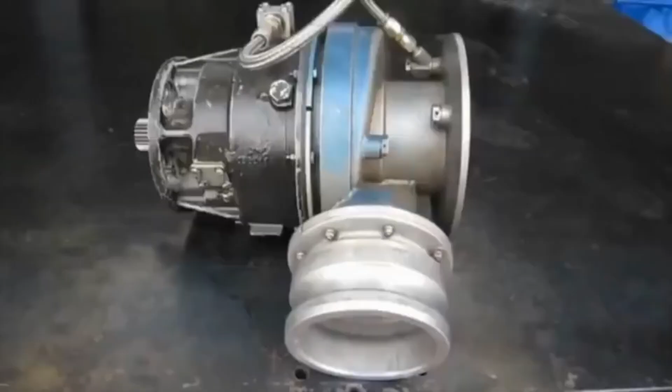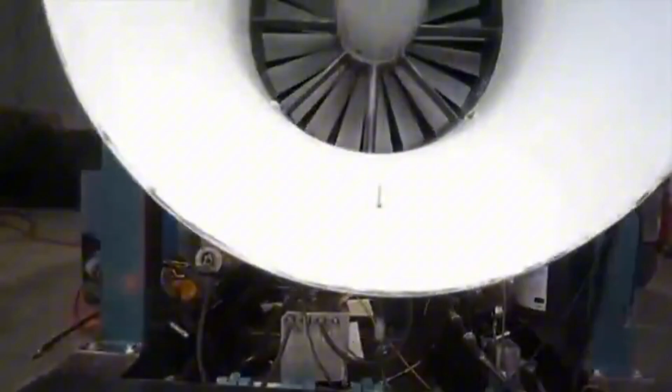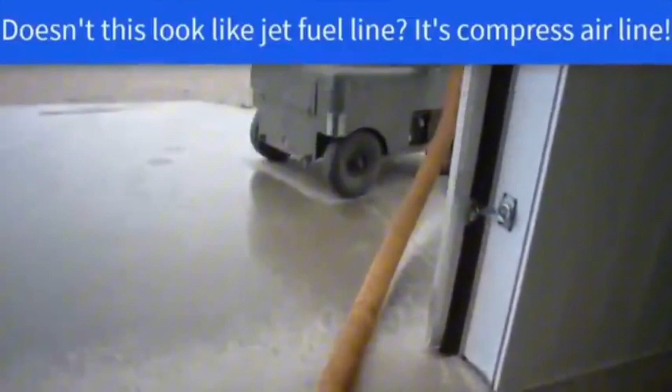We've shown this thing many times, but we're going to take a much closer look at it today. This is an air turbine starter for a jet engine, this jet engine. And there we go, our starter's attached, the airline is hooked up, start cart's in position, and Mr. Bill is warming up the fuel system. We get a little bit of light rain just before we run this engine.

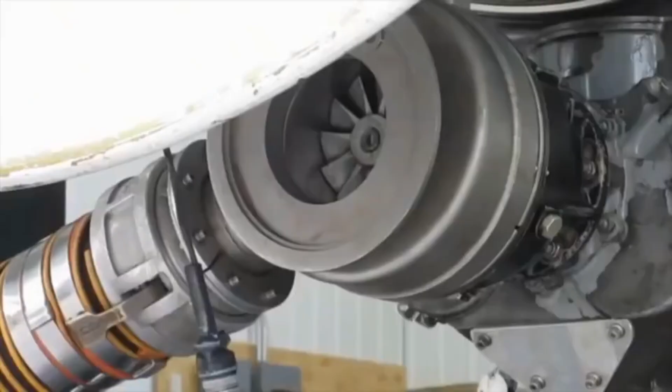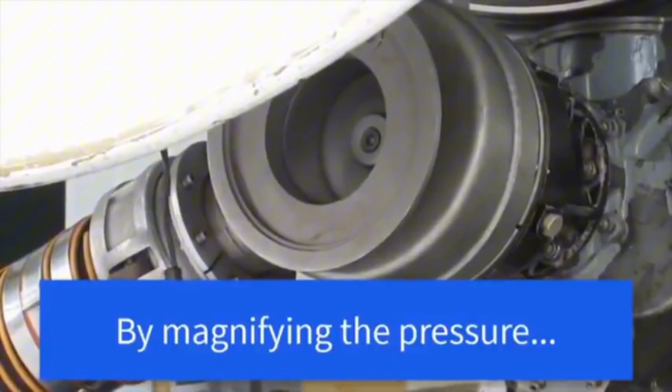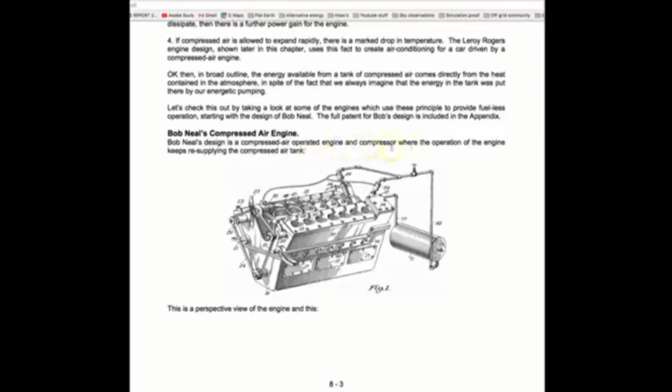Fuelless engines. The energy in air: Bob Neal's compressed air engine. Bob Neal's design is a compressed air operated engine and compressor where the operation of the engine keeps resupplying the compressed air tank.

Scott Robertson's compressor system. Bob Neal's system could do with some further explanation, so here's an idea from Scott Robertson.

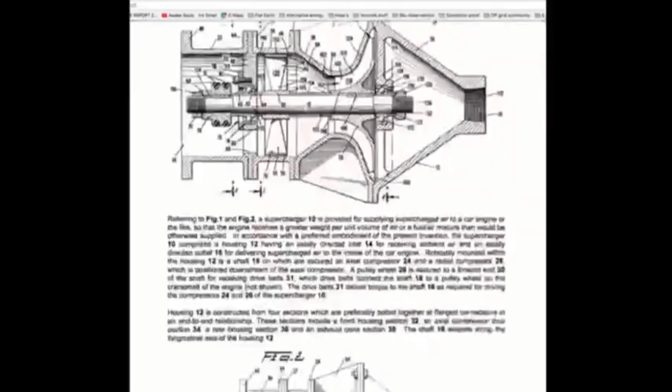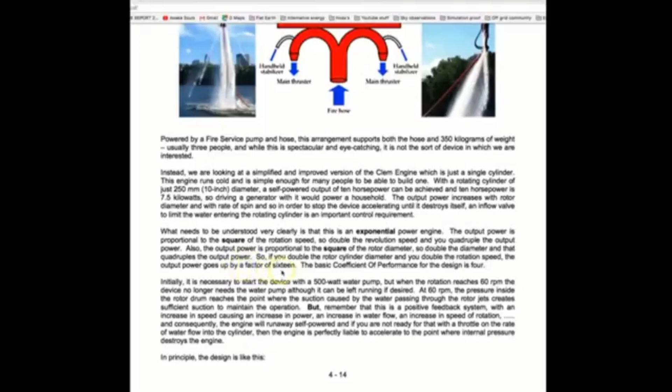What you need to understand very clearly is that this is an exponential power engine. The output power is proportional to the square of the rotation speed, so double the revolution speed and you quadruple the output power. Also, the output power is proportional to the square of the rotor diameter, so double the diameter and that quadruples the output power. So if you double the rotor cylinder diameter and double the rotation speed, the output power goes up by a factor of 16.

We have the engine manufacturers themselves saying that 90% of the thrust comes from the compressed bypass air and not from the combustion chamber. That's not me saying that, it's the people who design and make these jet engines. So it must be true, right? Yes and no. Let's get into it.

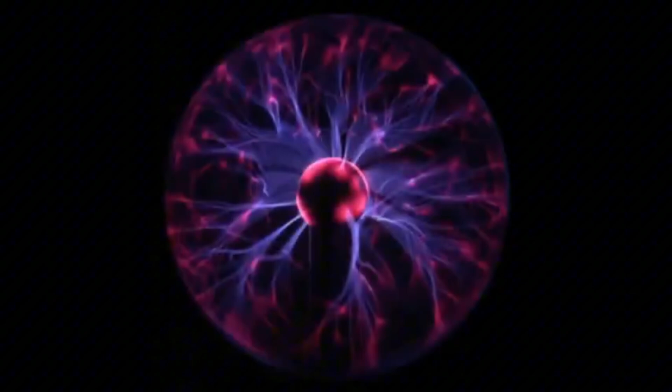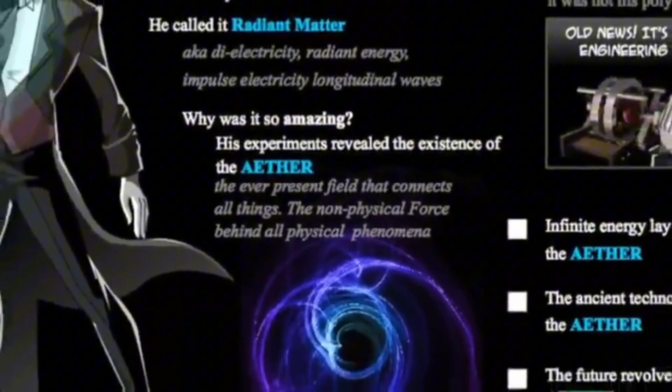To make sense of all this, we have to embrace the idea of the ether. The ether was a totally accepted element in the past. Before Einstein and his wife concocted the widely acclaimed relativity theories, everyone, including all of the scientists, knew the existence of the ether. In one fell swoop, Einstein got rid of the ether and everybody else followed suit.

The age-old technologies used in the design of these aircraft and engines also utilize the properties of the ether. That's the bit they're not telling us. To do so would fly in the face of contemporary scientific thinking, and they would be forced to recognize the existence of this hugely important element.

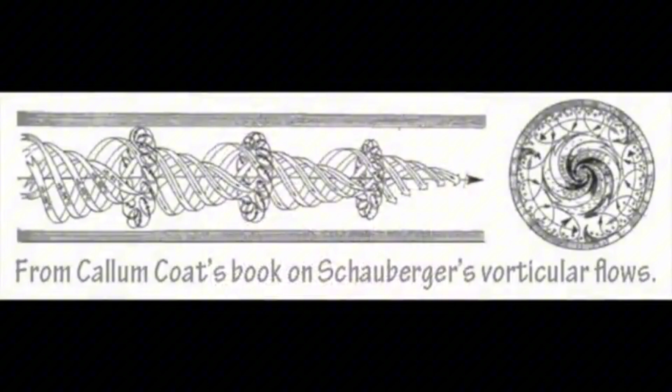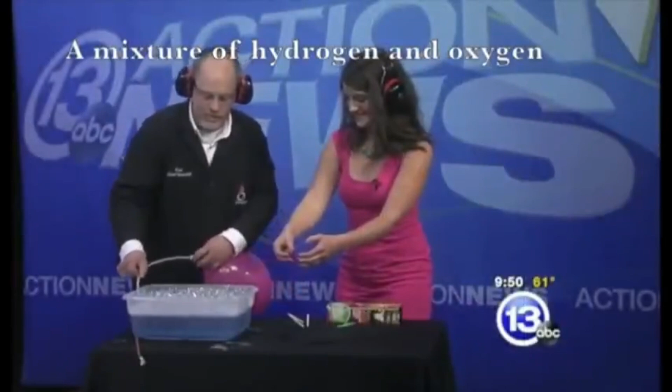Let's start with implosion technology to show you that he wasn't just making this stuff up. As you will see in this clip, the gas that she's holding would normally be enough to blow a gaping great hole in her hand, but it doesn't, because it implodes rather than explodes. The force goes inwards rather than outwards. Implosion technology. In 3, 2, 1.

Okay? You could judge by the loudness of the implosion that there was a great deal of energy created, enough to seriously injure her, but apart from being slightly shaken up, she seems fine.

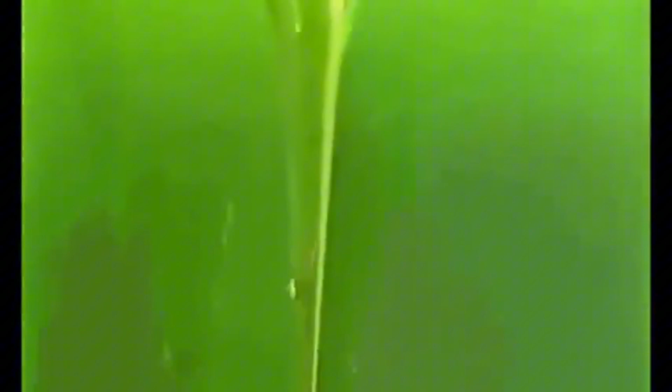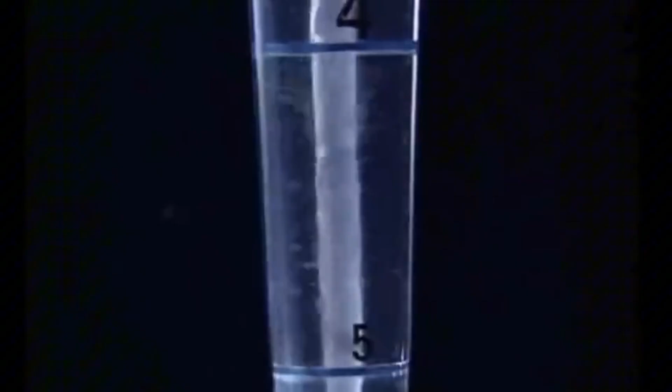Victor's main body of work was with water, but he postulated and demonstrated that this technology works just as well in other mediums, one of them being air, or the ether. Air is our medium, water is for the fish, but the two are intrinsically locked together because both mediums behave the same way when coerced. These patterns and properties are used throughout nature, in the environment, in trees and shrubs, in flowers, and in animals. Basically, the whole of nature conforms to these rules, and Victor figured it out.

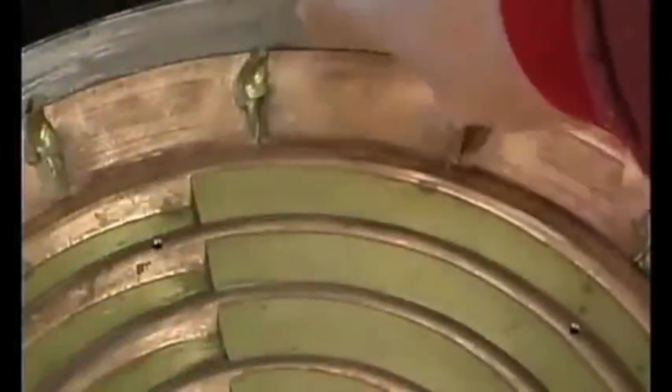As I showed earlier, Victor confirms that using the vortex idea on an aircraft, it will literally suck its way through the ether rather than thrusting against the air molecules. Schauberger's central approach here was the principle of matter transformation. The elements of the air, particulate matter and gases, are converted in this repulsator. One part escapes through the ring rotator, and the radiation energy, Schauberger talks about synthesis electricity, is emitted through the central axis. The repulsator creates a biological vacuum along the axis in front of it, into which the aeroplane is sucked.

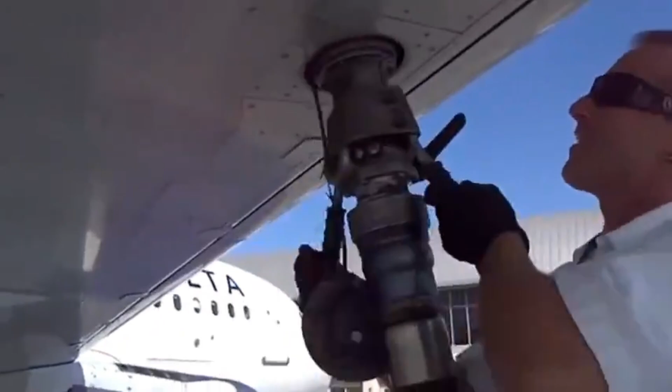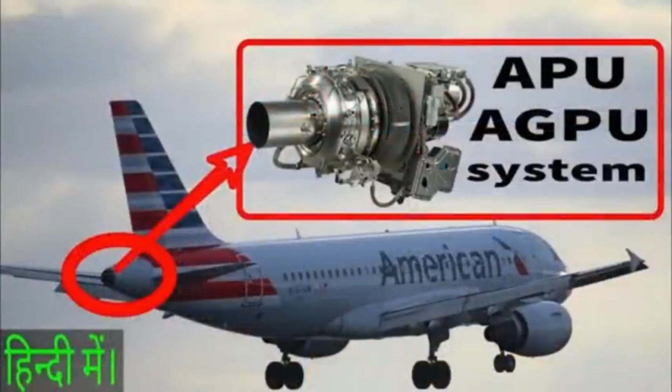The relatively small amount of fuel on board is used for takeoff, landing and taxiing. It's also used for the APU, the auxiliary power unit that's situated at the back end of most commercial aircraft. This is a small jet engine configured as a compressed air generator to feed the main engines at startup and during cruise mode, amongst other functions.

Military aircraft like fighter jets use a lot more fuel than commercial aircraft. They need the extra power and thrust that combustible fuel gives. In cruise mode, a commercial airliner does not need the extra power, as its forward motion is sufficient to suck enough air into the engine.

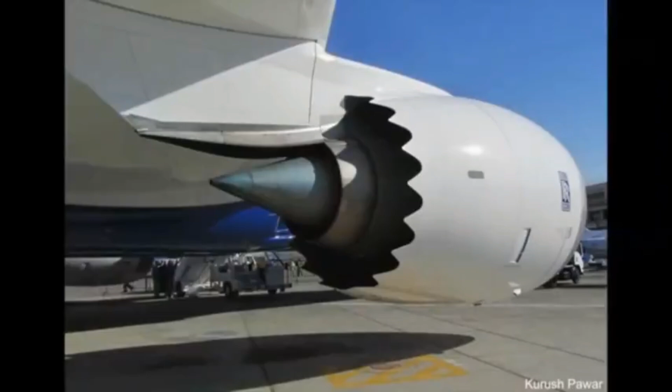Just a little observation here. The engines are designed to sit forward of the wings on pylons. From an engineering standpoint, it would be much easier to place them directly under the wings. As most people think, the jet engine spews out masses of superheated exhaust gas. If this was the case, then why would they put the exhaust directly under the wing where all the supposed fuel is stored? Next time you look at an aircraft, try and find the scorch marks under the wings from all of the super hot gases.

You won't find any. The small amount of hot gas being ejected from the combustion chamber is surrounded by cooler, compressed air. Don't you think that these people should be in hospital with nasty burns from the super hot gases?

Before we leave Victor number 1, let's look at his vortex principles at work in real time. If you think his principles are just theories, then feast your eyes on this.

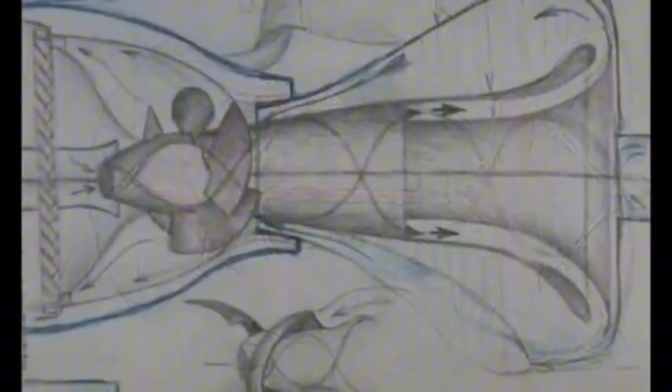There is much more to talk about with Victor Schauberger's vortex principles and how aircraft manufacturers utilize the natural forces of nature to assist flight, but I don't want this video to be too long. Again, check out Victor's work for yourselves and you'll see the connections.

Time for Victor number 2. Viktor Grebennikov is lesser known than Schauberger, but his research and experimentation is just as extensive and important. It also derives its reasoning from nature. It's a man named Grebennikov from Russia.

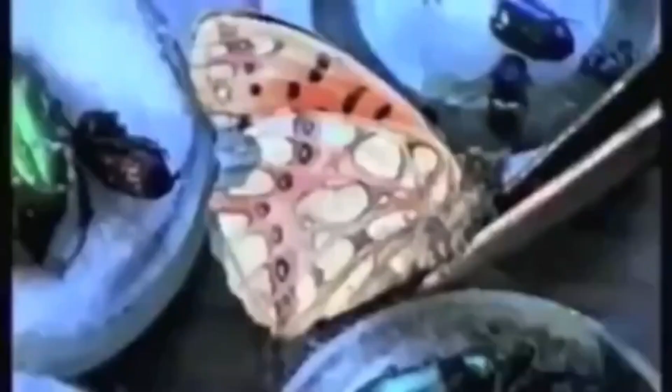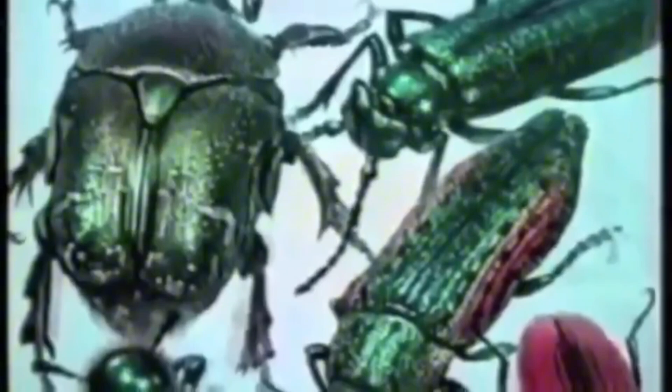Grebennikov was kind of a non-conventional scientist. He was an entomologist, did a lot of work with bugs, entomology. And his favorite thing was to go out into the steppes of Russia and into the various outer hinterlands and camp out in the summers and study his favorite subject.

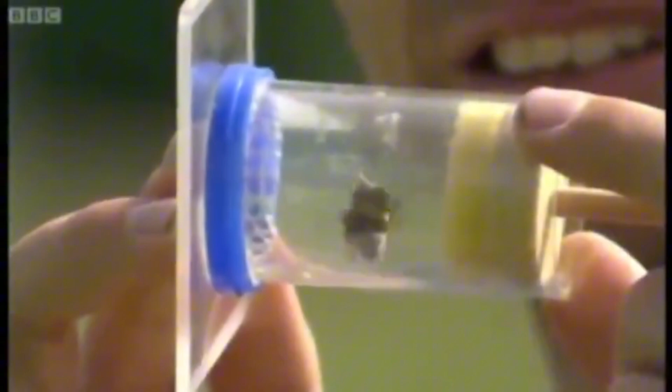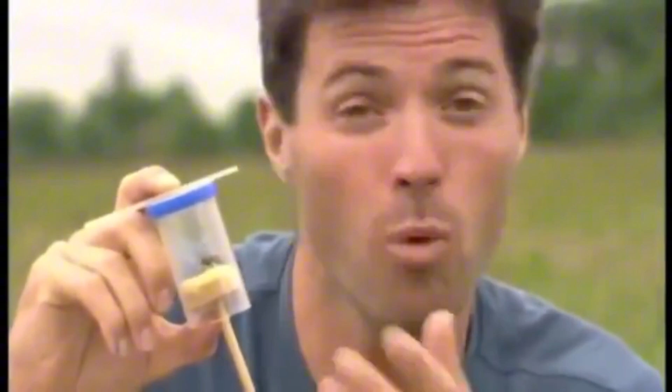This might look like a radio-controlled bee, but it's actually a bee with a little radar transponder on it, which means we can track this bee as it flies around the field. And these little guys can carry 90% of their body weight in pollen, so it won't affect the way it flies. First of all, the bees are flying much faster than predicted, an incredible 30 miles an hour, even when fully laden.

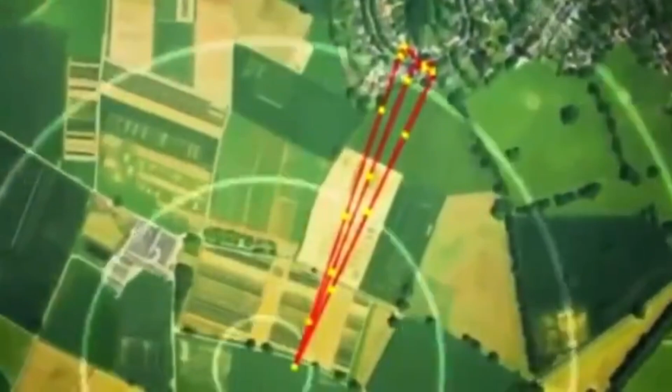The next surprise is where the bees go. They almost always overfly potentially decent food. And once they've found their patch, they then repeatedly shuttle to and from it. And this is the really clever bit: in spite of 30-mile-an-hour crosswinds, whether out or back, they all fly in dead straight lines.

A bumblebee can't fly aerodynamically. Yeah, and he's right. And I said, well, what did bumblebees do? And they said, well, they levitate. And I said, well, how's that? And he says, come on, I'll show you. And he showed me, he wrote a book, incidentally. I don't know if it's still in print. It's in the Library of Congress.

The book is called Tomorrow's Energy Need Not Be Fuel. And in that book, he gave reference to what I'm talking about, that of levitation, that the bumblebee, when he starts to beat his wings, when he starts to flap his wings, there's a little cavity, a hollow cavity next to the larynx inside his system that's hollow. And when he beats his wings, he starts to resonate this energy, and it goes back and forth.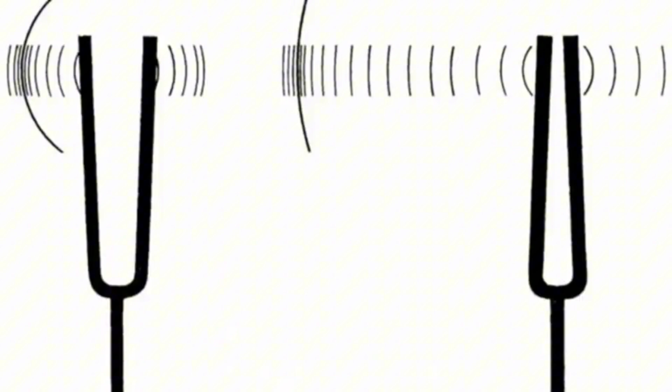Just similar to a guitar strumming on one side of the room and hitting the same chord on the other side of the room, or somebody hitting a high C and breaking a crystal. It's the same thing, it's resonance. And he said what they do, they resonate. And when they resonate, they eventually reach the resonance of the field around them.

And he explained it this way to me, that the Earth was, of course, spinning, but it was operating on a frequency of 8.5 hertz per second or so. And he says once this bumblebee hits that resonant frequency of its surroundings, it becomes a free agent. It creates a magnetic bubble around itself, and it can go anywhere it wants.

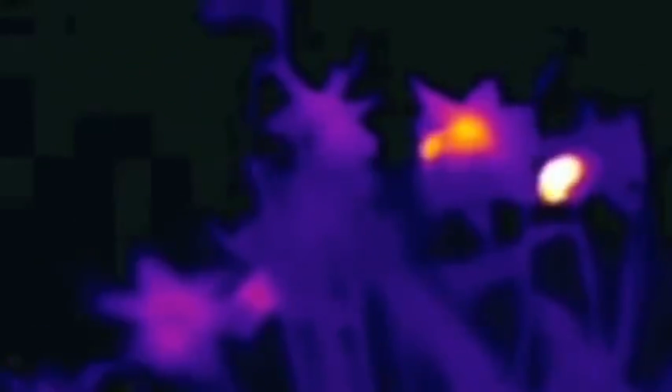And I said, well, that's not in any of the science books. He said, I know. You probably never see it there either, but that's what happens. They'll discover it someday and bring it out, but we have a conventional way of doing things, and then we have a natural way of doing things, and they're totally different, diametrically opposed. The important point here is the bees.

As you've heard, the bumblebee shouldn't really be able to fly. Those wings are way too small to lift that chubby little body off the ground. In fact, it's a bit of a conundrum also for mainstream scientists. They can travel in perfectly straight lines for long distances without any deviation, even during a howling crosswind.

Because of the resonant frequencies produced by the vibration of their wings, they create a bubble in the ether, protecting them from any outside interference. So levitation by sound waves is a real-world effect. You want more proof?

That the bug wings themselves were creating an anti-gravity phenomena under certain conditions. These technologies are known and used in modern-day aircraft manufacture. The vortexes being produced are helping the lift properties of the aircraft. This is why the engines are forward of the wings. If they were underneath the wings, then the vortex wouldn't do its job. It has to flow over and not under the wing.